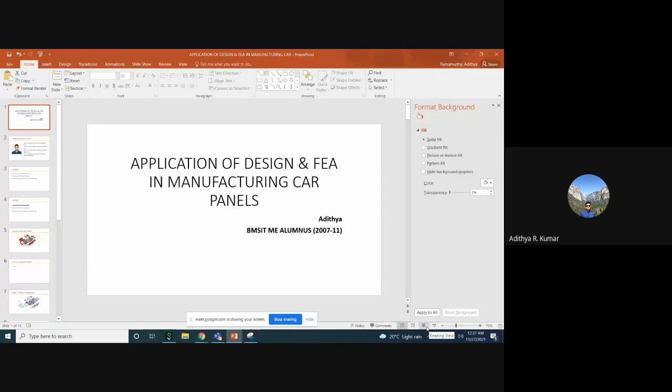So let me go ahead and share my screen, and let's go through. I'll try to keep it simple; I don't want to get too technical. This is just to expose you guys to some of the field specializations we have in mechanical engineering. And yeah, we'll start from there. So today's main topic will be application of design and FEA. FEA is finite element analysis, in manufacturing car panels, and I'll be specifically dealing with the outer car panels.

So before I get started, could one of you confirm if you can hear my voice correctly and also see my first slide? Yes, sir, it's visible and you're audible.

Okay, perfect. So as I mentioned, I won't get into the nitty-gritty details like the formulas and everything. With finite element analysis, I have seen that people have mixed opinions, because I think you guys went through this course in your 6th semester, which happens to be one of the toughest semesters for mechanical engineers. But the applications of finite element analysis in the real world are huge and fantastic. It's not necessarily all formulas. I'll just share my experience here.

So just a brief introduction of myself. Sir already mentioned some of my portfolio, but just to keep it academic and professional, I graduated from BMSIT in 2011 with mechanical engineering, and I already had plans of completing my higher education. So the University of Missouri in the US is where I completed my master's degree from 2012 to 14. And then my journey in the field of FEA and design began in 2015. I started as an application engineer at Autoform, and I'll give you an introduction to Autoform as well.

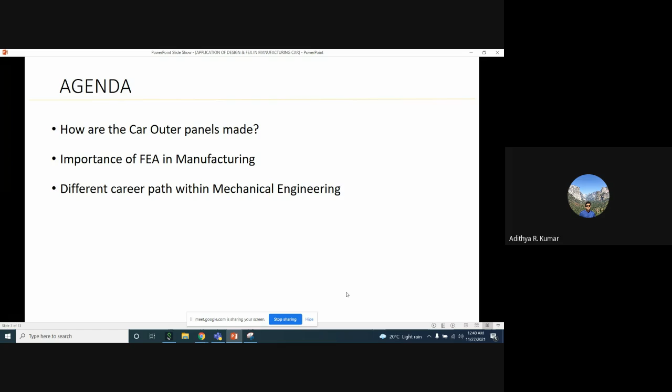Okay, so first topic, how are the car outer panels made? If you just observe a regular car, it doesn't have to be anything specific, what I have colored in red is called, in the manufacturing world, class A's. Class A is anything that's directly visible in a car. If you look at a car, these are the things that are directly visible: there is the hood, the front grille, door, roof. Then these are called tailgates here.

So the department that I work in is responsible for the design and also the manufacturing of these outer panels. There are about 256 different components, just the sheet metal components. And my expertise right now lies in just the outer panels, what's directly visible to you when you look at a car.

The doors and the hoods. That's what we design and manufacture. So I'm very sure you haven't thought about this, but these are actually sheet metals, like they're steel and aluminum. It really depends which car and which model we are talking, but they are sheet metal and their thickness ranges from 0.6 to 1 millimeter. That's how thin they are.

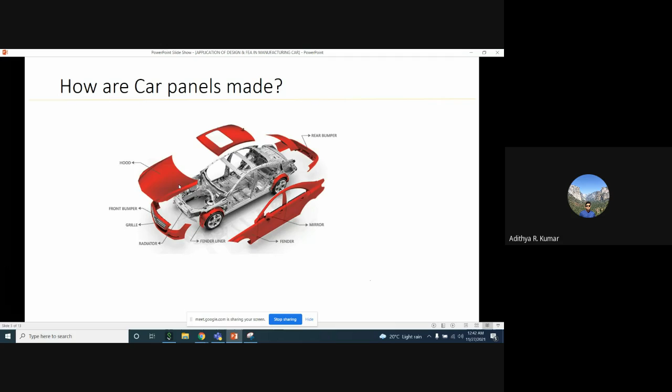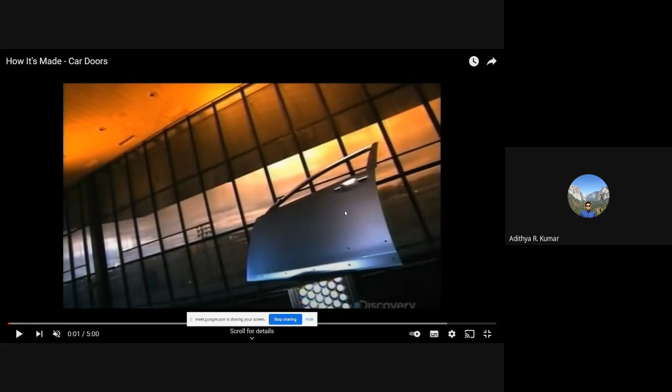So okay, let me switch to a video to show you how the manufacturing of the car takes place. Right, this is just the manufacturing of the door that you open in a car to get in, right? So let me just walk you through how the door is manufactured. It has a lot of different processes to it. So what happens first is, see the sheet metal that I spoke about. This door that we saw right now, this is what it looks like in its infancy stage.

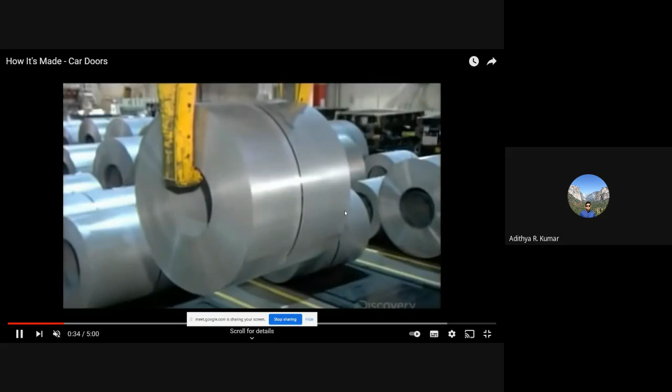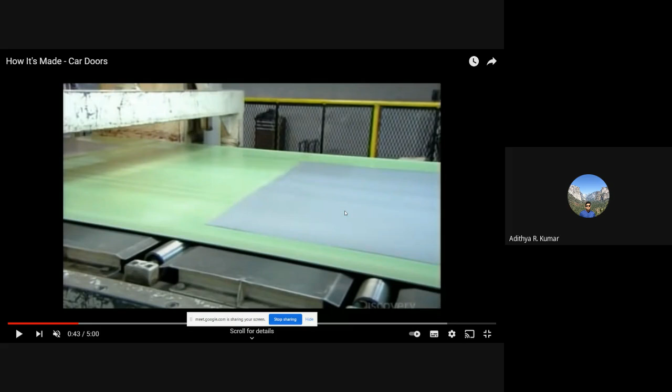This is the sheet metal. It's only 0.6 millimeter thick. This is the very first stage of that. So this is the sheet metal, we call this our coil. This is how it looks. This gets fed into the conveyor line and they get trimmed to the size of the door. Okay. So they get trimmed and then it goes into something called a stamping press. So these guys come and assemble that on a stamping press.

And they're completely flat now, right? The sheet metal is completely flat. It doesn't have any shape. It doesn't have any strains on it. And what these guys are doing currently is they're assembling it on something called a stamping press. There is a lower punch and there is an upper die. So here there is a lower punch and here there is an upper die. And what happens next is that the upper die comes down at a tremendous pace.

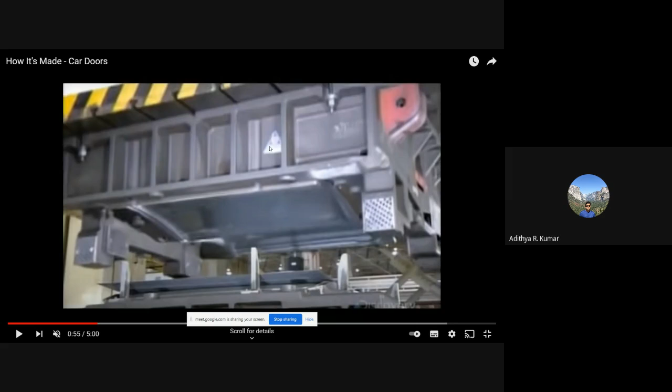The pressure it's applying is about 200 tons of pressure. That's a lot of pressure we cannot even imagine. When it does that, the sheet metal is initially elastically deformed and then it gets plastically deformed. So we all know as mechanical engineers what happens when anything is plastically deformed, right? The shape will stay there. It won't go away. If it is elastic, it will come back to its original position. If it is plastic, the shape will basically remain there. It's impossible to get that shape away.

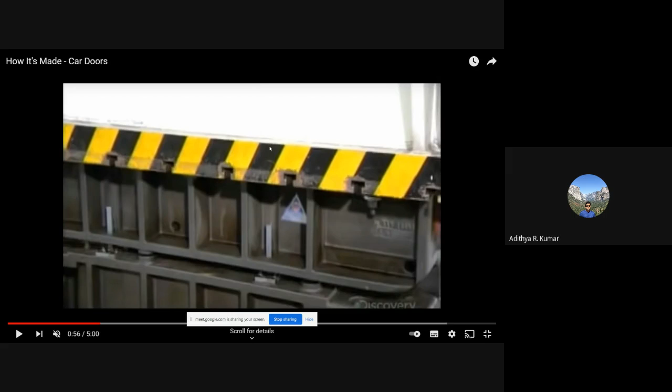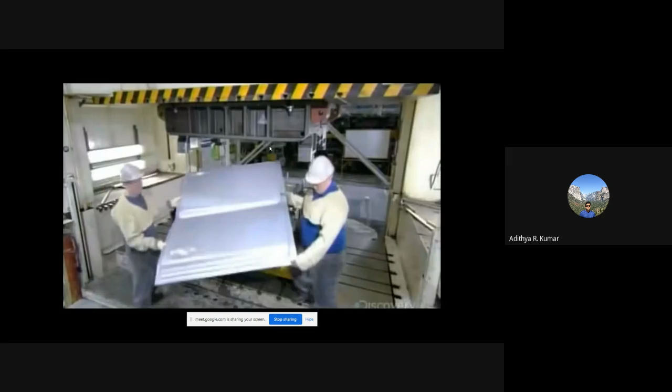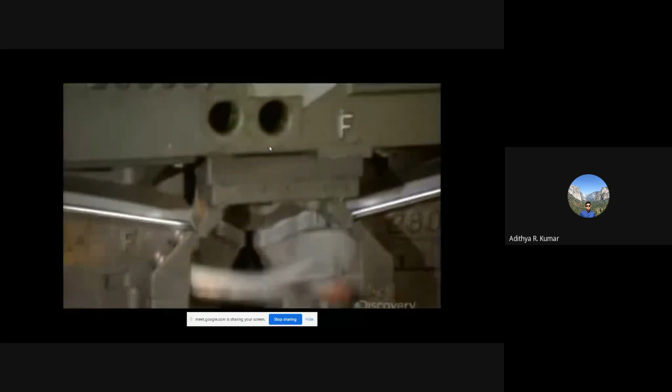So the sheet metal is plastically deformed, and this is what your initial flat metal looks like now. This is your door that is going to be assembled in the car. This is what it looks like because of so much pressure being applied and because of those tools coming down and pressing against each other. That is your door. And then it goes from station to station. It basically trims off the excessive material that's not required. And then there is something called a restrike. We won't get into this, but this is the conveyor process.

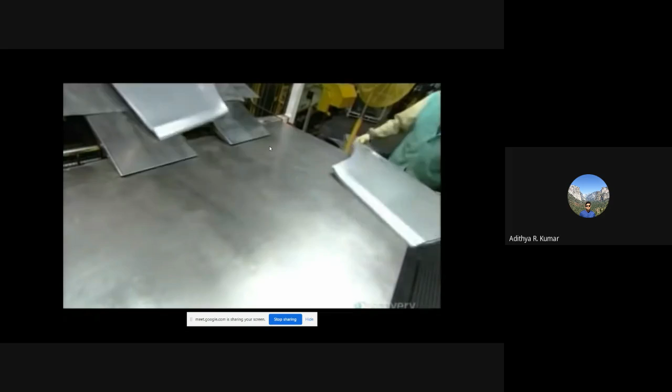And then the door comes out and the guys will check for surface quality, because surface quality is very, very important, right? When you look at a car, you cannot afford to have wrinkles, or any fractures in it, or any surface defects. It should be very spick and clean, there cannot be any defects on that. So it's very important, and all these things come into play in the manufacturing process.

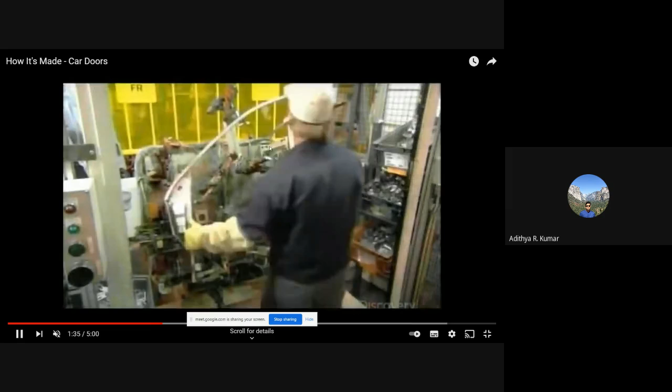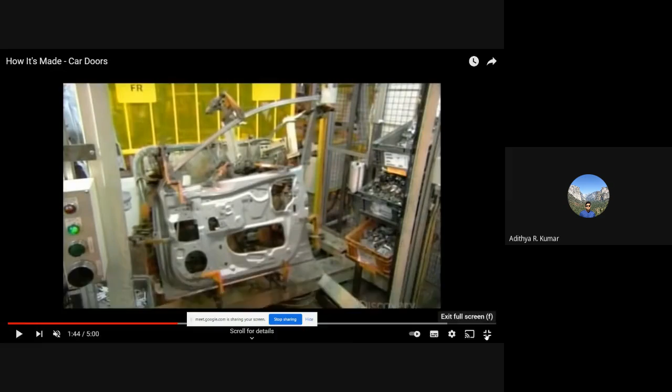And then basically they are measured and assembled, and we will stop this video right here, but they're assembled after this, and it goes into the assembly line and is assembled to the final car. So that's just a brief introduction of how the outer panel of the car is manufactured, and this is what happens.

So let's go through now, what are the stages of that, right? So now, for example, it can be Tata Motors. They're planning to develop a new car model for 2024, maybe 3 years from now. So let's go through the stages of what happens. The first stage is product development. Now, a few of you might have expertise in product development down the line. You might be very good in 3D surfacing using CATIA or NX or SolidWorks.

So the development of a 2024 car has already begun now. That's how early we start in the automotive industry. It's not like there is a 2024 model, we start manufacturing in 2024. It doesn't work that way. We have to start work 3-4 years ago, because there are a lot of things that go into a car and get assembled down the line. So it takes a few years to do that.

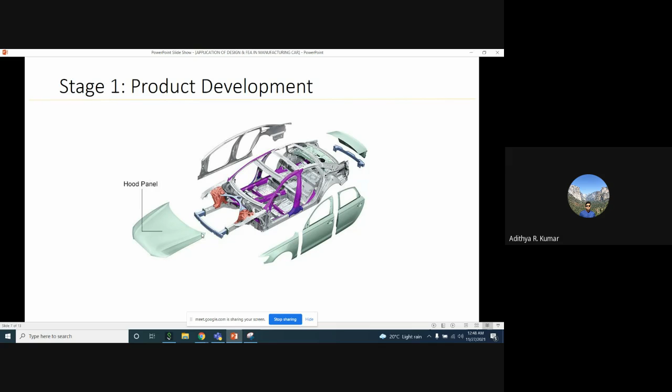And then what you do as product developers is give that product to feasibility engineers, or basically manufacturing engineers. To put it in simple terms, you give that product to manufacturing engineers. Now, it's the job of a manufacturing engineer to make sure that that product is made or manufactured. And this is where my expertise lies. I am a manufacturing engineer, and I get this product from the product development team.

Right now, we are getting a lot of electric vehicle projects, because EVs are definitely on the rise right now. If you think about companies like Tesla, now Rivian, there is a new company, there is Lucid Motors, even Tata is getting into that. So we are getting a lot of projects where we are targeting electric vehicles.

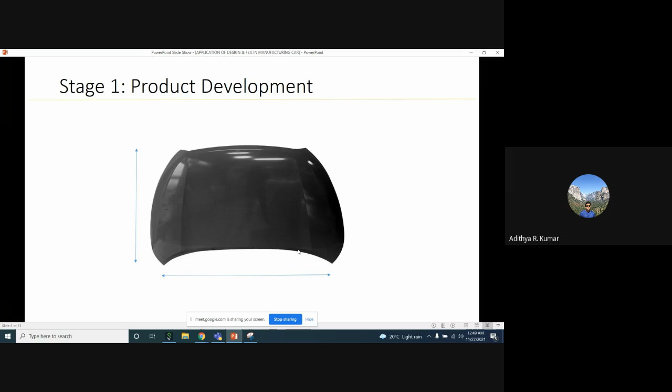Now our job begins. So what we do is we take the product that has already been developed, and our job is to make sure that this product is manufactured without any splits or fractures or wrinkles or any surface defects. Now that is something we call in manufacturing the advanced feasibility. There are a lot of things that go into it, but I'll shed some light on what exactly goes into it.

So once we get these dimensions and the product models from our product development team, right now our work is in CATIA. We develop something called a punch. So we take that product and we basically create surfaces from that product that go tangentially. I will try to keep this simple, but basically you see the product here. This is the exact same product.

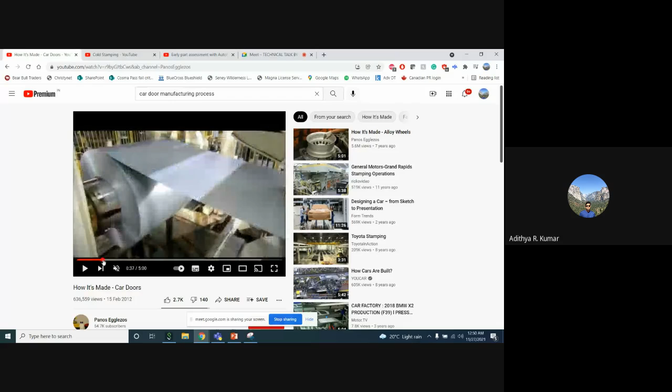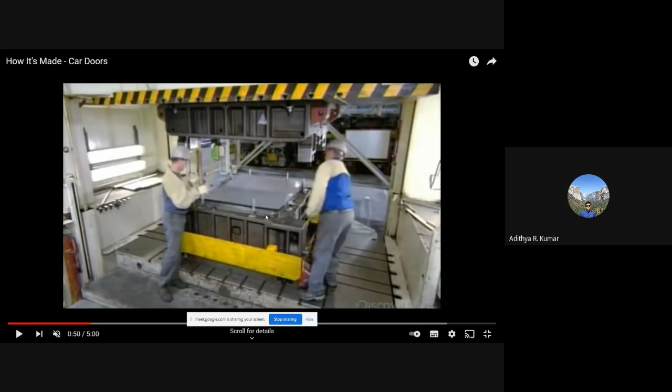And what we do is, from its boundary, we try to develop tangential surfaces that go tangentially outwards to a certain degree. And that is what in the stamping manufacturing world we call a punch. So when we go back to that video that I showed you, let me forward that a little bit. So the punch is what is at the bottom here. The punch is basically the product shape plus some additional surfaces, and it is in the bottom.

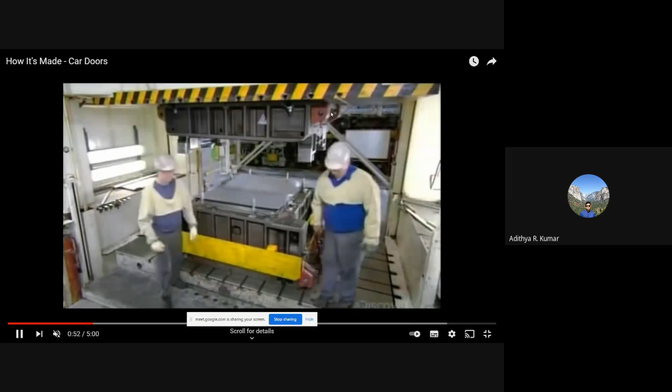Okay. And then we create one more surface, which is called the binder, that gets attached to the punch. When the punch gets attached to this binder, we call that a die. And now go back to that same video. You can see that the die is what is here. It's the cavity. It's a female cavity. You can see the shape here. It has the cavity shape.

So that comes down. The punch from the bottom comes up, and the sheet metal, which is the thin layer, gets smashed in between. And the metal gains the shape of this cavity here. That is, in very simple terms, what is happening. So it's our job to design this upper cavity and to design the lower punch.

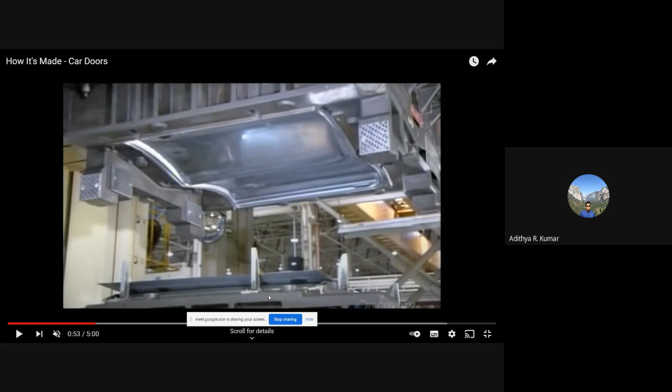That is our job. And I put it very simplistically, but it's not as simple, because now comes the role of finite element analysis. You might be thinking, okay, we are done with the design. The design portion is to just create the upper cavity and the lower punch, and then you can design your doors. It's not as simple, because now comes the application of finite element analysis. So let's go and see what is the importance of finite element analysis in manufacturing.

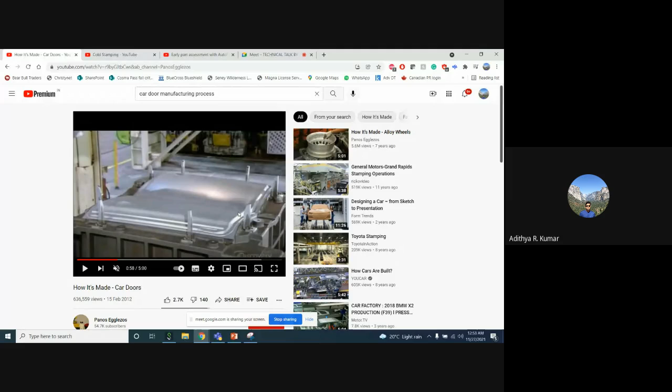When I showed you what happens in this process, I just showed you a best case scenario where the door is being manufactured without any defects. But because there is so much pressure being exerted by the upper cavity into the lower punch, in the real world what happens is something called a split. The panel basically splits because it's plastically deformed beyond a certain limit, past its ultimate tensile strength.

So this is where the application of finite element analysis comes in. Just imagine if you design tools like the die and the punch, and that gets assembled in the manufacturing press, and you begin stamping such parts, your company will file for bankruptcy in about 2 or 3 days, because this cannot happen.

So now is where finite element analysis or simulation comes into play, because before you can even think of machining your tools and assembling them in the press, you have to go back into simulation and validate and analyze if that tool is actually going to work. These days simulation software is so advanced that you can create your tools in simulation, like what I showed you in the previous slide, and see if the panel you're making, based on the pressure applied, like 200 tons, will split or come out cleanly. You can validate that in simulation.

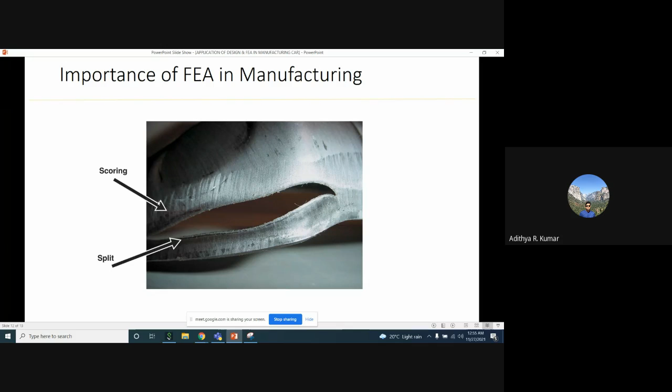This could be like 6 months before production begins. You bring those tools into the software and input your lubrication, your material properties, and the pressure being applied. The software will tell you if the panel is manufacturable without problems like splits, wrinkles, and surface defects. Let me go back and show you how the software looks.

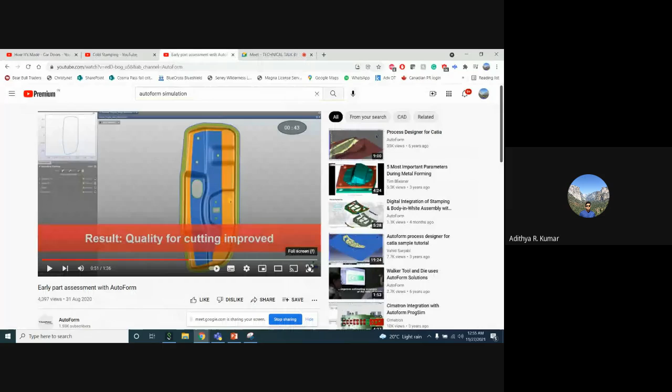So this is what the interface of the software looks like. It's a very simple interface, but a very, very powerful software. This is where we import the tools. This is a different panel, but this is how you can import the tools.

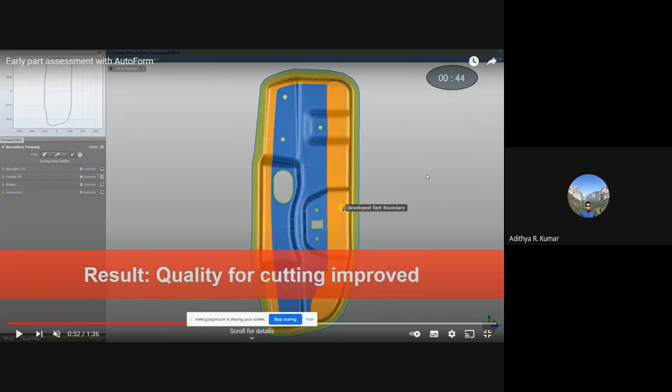AutoForm has a finite element model, a solver behind its graphical user interface. It takes into consideration the material properties, the pressure, and the lubrication, and it will tell you, see here, it will tell you the part will split here. Anything green is safe. Anything red is where you have insufficient stretch.

But here, if you look closely, there is a potential split coming up. It means that if you machine your tools and assemble them to manufacture, the part you finally manufacture will split or fracture.

So what AutoForm is telling you is change your design. Go back to CATIA, change your design, probably make the radius bigger, or maybe lower the pressure here. By doing that, you'll be able to avoid fracture. That's what this simulation software will tell you well in advance.

And the theory behind the working of the software is exactly what you learned in the previous semester. It's just the same: Force equals K into displacement. That's all the solver basically bases its capability on. There are some advanced iterations and calculations it performs, I agree, but it's not your job as a mechanical engineer coming into the professional world to memorize formulas.

Your job is to analyze within the software to see how well these tools can be manufactured. I know you might be overwhelmed with some of the concepts in finite element engineering, but once you get into the real world, this is what you'll be dealing with. You'll be dealing with analyzing fractures, analyzing insufficient stretches, and all these different nuances.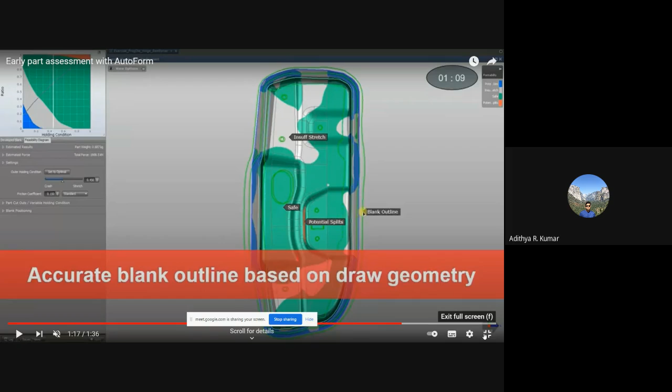Once we get a clue like this, it's our job as advanced manufacturing engineers to go back and fix our design. We basically go back to CATIA in this case. I can show you a quick example. Suppose the part is splitting here. What we'll do as engineers is try to give a bigger radius so it doesn't have that sharp edge, and the material flows much more smoothly, and the split doesn't happen anymore.

So this is how we go back and forth within the software. Once the software tells us that yes, now the panel is completely makeable or manufacturable without any splits, that's when we machine the tools, and that's when the manufacturing begins, the actual production begins. So there is a lot of process that goes in the background.

If some of you guys can relate yourselves to being finite element engineers, then this is what you will be having as your profession. This is not exactly the profession, but one of the career paths you can take is the sheet metal stamping industry, basically the car exteriors. If you're completely into design, then you can think about becoming product developers. But if your expertise is half design and half simulation, like mine, then you are much more suited to become manufacturing engineers, and that has a lot of potential as well.

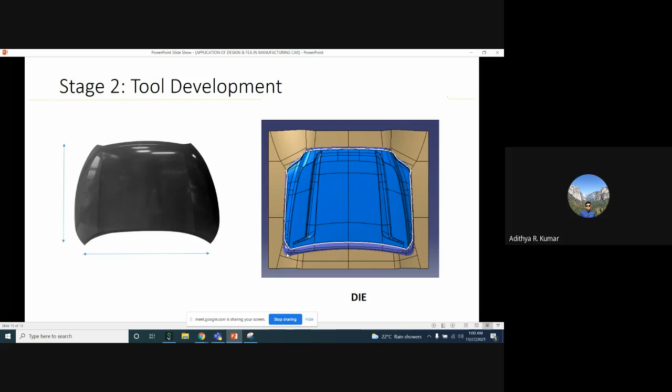So the next thing, just to summarize the importance of finite element: it saves money upfront. If you machine your tools, let me give you a very rough estimate of the cost. If you machine your tools for a door panel, the cost of the entire stamping press is about $1 million.

So $1 million is 10 lakh. If the part splits, if it doesn't hold good in the manufacturing press, then you're basically wasting $1 million for your customer, which can be General Motors or Tata or Tesla or anything, and they will right away stop giving you contracts. They won't give you any contracts anymore because you already wasted them so much money. So the entire tool for just one part, I'm just talking about the door.

There are 256 different parts in a car, the sheet metal parts I mean. And if you do something wrong within just one part, the tools to manufacture just one component is about $1 million. And if that goes to scrap, then your company is held responsible for that.

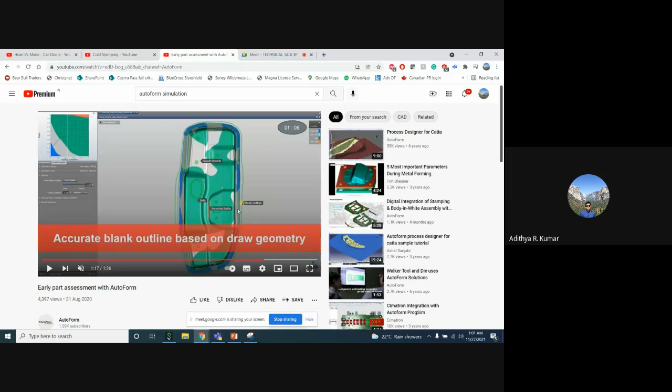So instead of doing a design and directly machining and then realizing the problem, finite element analysis will show you upfront if you have a problem, like what I showed in the video here. It will already point out, yes, there is going to be a split here. Now you can question this, how accurate is this? This is pretty accurate as long as you get your material properties right. This is very accurate actually. This is just basic finite element analysis. So it will save you money upfront by virtual analysis.

It reduces rework in production. In production, there can be problems with the machines because your part is splitting heavily, so your machines don't function properly. So there could be rework of the machines that can be skipped if you use finite element analysis properly. The third thing is it reduces extra labor, because if your machines don't work, then you need physically some people to go test the machines and see why isn't it working. That's extra labor. So that all leads to optimal design that you can get with finite element analysis. So design and finite element analysis pretty much go hand in hand in manufacturing.

So now I'm done with what I wanted to present in terms of design and FEA and how that goes in the manufacturing process. I will get into different career paths for mechanical engineers in just a bit, but since it's the end of my presentation in terms of my actual concept, let's stop here. Before I proceed with the last topic, different career paths, we'll open the floor for any questions, please.